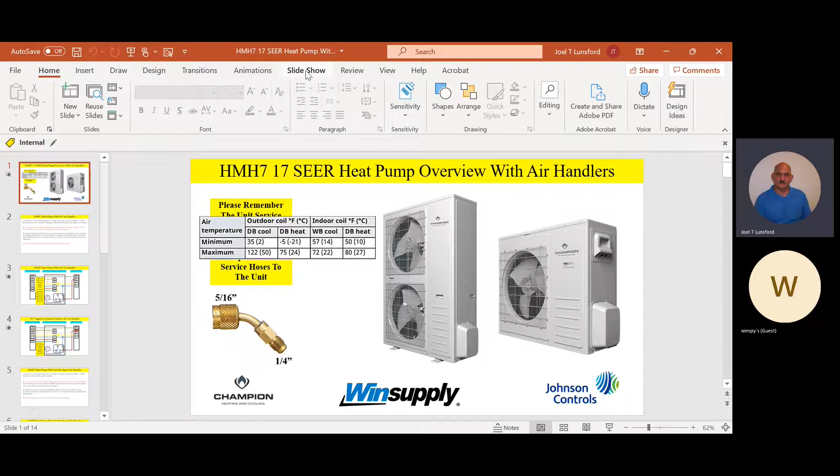And so everyone should be able to see that opening slide. There's two pictures of the outdoor product. There's a 2-fan model and a single fan model. Can everyone see that okay? Yep. Yeah, we got it.

All righty. Well, fellas, kicking off a little bit, one of the things I like to always start with our heat pump overview is the fact we've actually got two footprints, if you will. We've got a 2-fan model. That's going to be the 4 and 5 ton model. And then the single fan model will be the 2 and 3 ton model. So they come in whole tonnages, 2, 3, 4, and 5.

These units modulate on the outdoor unit from 35 to 100% capacity, even though we're going to use a conventional thermostat inside. And a conventional thermostat, what I mean by that is your favorite 24-volt thermostat. So it wires up like any other single-stage heat pump, except it actually modulates outside 35 to 100% capacity.

In addition, we get a lot of questions about the outdoor unit because it kind of looks like a mini split, with the horizontal discharge and all, but I want to stress something. It is not a mini split. Now, it shares some similar technology on the compressor in the fact that it is a modulating compressor from 35 to 100% capacity. But on the indoor coil, we use just a conventional plain Jane expansion valve. It isn't anything special. So you're going to wire it like a regular heat pump.

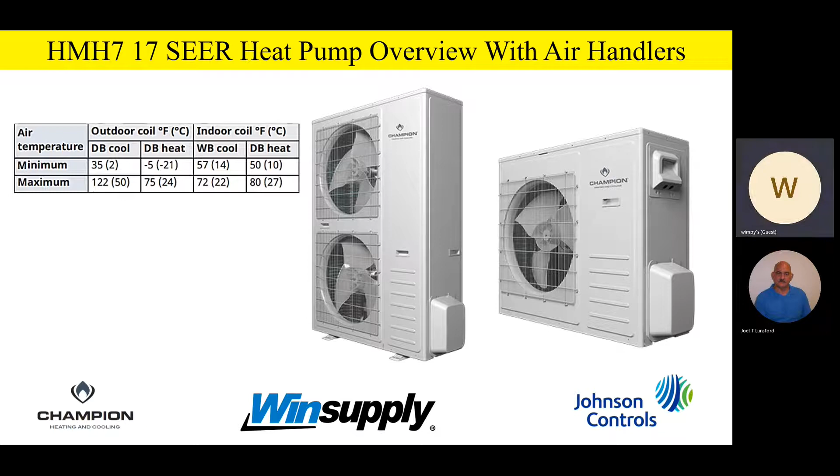Yeah, we've done a few of them so far. Okay. All right. Well, fantastic.

So fellas, at this time, we're going to jump into the low voltage wiring of this heat pump. And we're going to be focusing first thing this morning on the AE air handler, which features just a standard ECM type of motor. And then later on in the training program this morning, we'll also jump on a variable speed air handler, because I know you guys have a real heavy air handler market down there. And the variable speed air handler works very, very well with this thing as well.

So we're going to start out with the low voltage wiring with the AE air handler, and we're going to just look at a simplified block wiring diagram that I generated for this. And remember now that the AE air handler does not have any terminals on there, but they're pigtail connections, as you guys know if you've hooked some of these up. But what I've done on the PowerPoint, I've made kind of a little terminal or a little block so that you could see where it hooks up, even though I know there's pigtails on those connections.

We're also going to talk about wiring that accessory single pole double throw relay in the indoor unit and how it's going to be used for airflow reduction. So I'd mentioned earlier that this unit modulates from 35 to 100% capacity outside, but when it hits about 60 to 65% capacity, it's going to send a signal inside to a relay to reduce the airflow on the indoor coil to give you a closer match between the point of modulation or capacity outside and airflow inside.

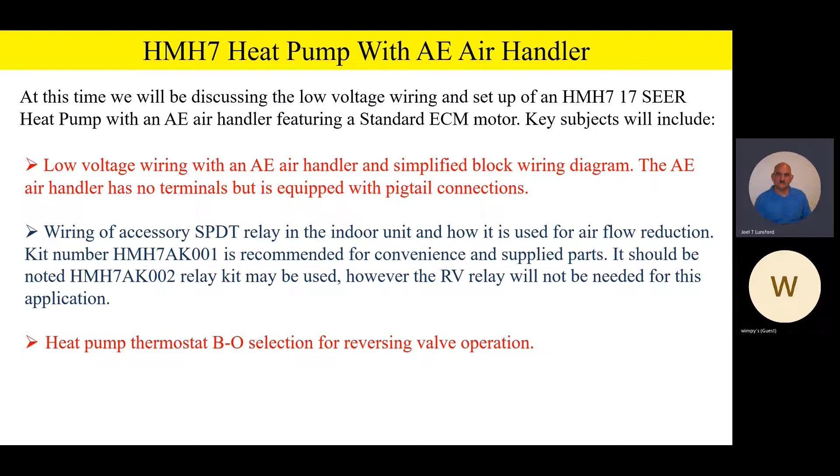So with that, let's go ahead and start looking at just a simplified block wire diagram on the AE air handler. And so we're going to literally take it wire for wire, guys, from the thermostat on the left-hand side, you can see, to the indoor unit, to the outdoor unit. And so that first wire we're going to talk about is that B terminal. The B terminal energizes the reversing valve in the heating mode of operation. And please remember, your thermostat has to have that selection for BO for heating operation on the reversing valve. And so if you've got a two-stage heat strip, we're just presuming you may have a two-stage heat strip in there.

So W2 from the thermostat will go to W2 on the air handler. That'll be your second stage auxiliary heat. And then your W1 will be from your thermostat first stage auxiliary heat to the indoor unit to the outdoor unit. Now, guys, please remember, we want to carry that on a heat pump here.

We want to carry that all the way outside, that W1, so that we can bring the heat strip on during defrost. That's what that W wire outside is for. Coming back inside to W1 is to bring the heat strip on during defrost. Then your Y terminal is going to be your compressor call.

Now you're going to note something that on some models of air handlers, if it's so equipped, you're going to see a yellow wire on the ECM motor. Now we're going to ask that you typically just remove that because we're going to be selecting some different speed selections on that ECM motor here in a little bit.

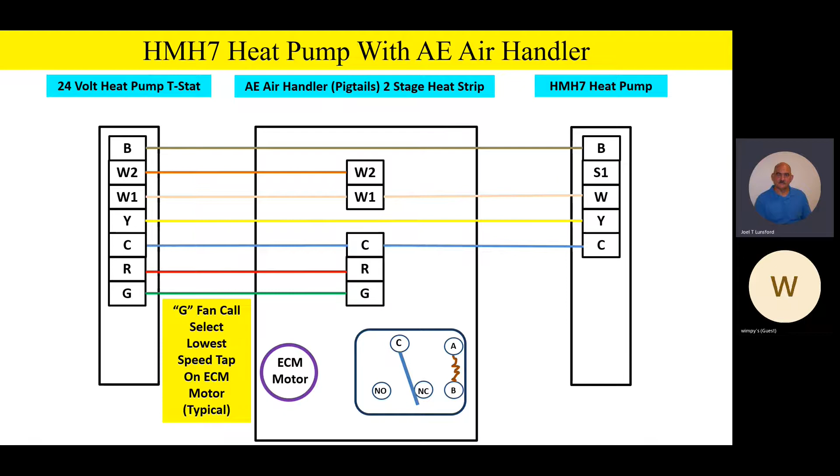So based on the type of thermostat you have, you may not want to break the red because that R terminal kind of powers the thermostat up, and some thermostats like to stay powered up for some of their functions and stuff like that. But that would work. But I would recommend the Y would probably be a little better for an overflow or like a condensate switch. Thank you. Good question. Excellent question.

All right, fellas. So as we start taking a look at some of the finer details on that relay, there's going to be a terminal outside called S1. S1 is going to be our airflow reduction signal from the outdoor unit. And we're going to take that to one side of our relay coil. It's a 24-volt signal. The other side of the relay coil is going to go to common. And that makes sense so that we complete that coil circuit to operate that relay.

So S1 will go to one side of the relay coil. The other side of the relay coil will go to common to complete that 24-volt circuit when we get that signal. Now the common terminal for the switching contacts will go up and grab that yellow wire or Y terminal going outside. So basically anytime we have a compressor call, we're going to have power to the common terminal of the switching contacts.

On the ECM motor itself, before we get into our other speed taps, our high-speed tap is typically going to go on your W. So what's going to happen is that if you get an auxiliary heat call, or if you get a defrost call outside, it's going to drive that motor to high speed for safety. Because remember, if we're bringing in heat strips, we want to make sure we have our full airflow so we don't overheat the heat strip, right?

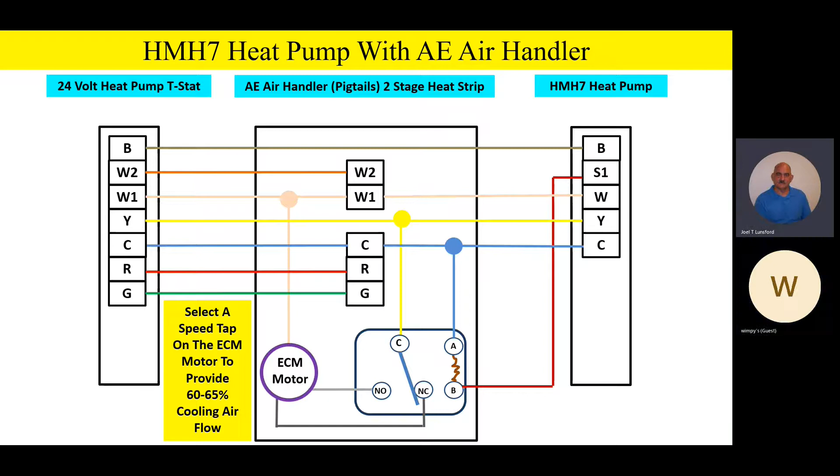All right. So as we take a look at it and we switch that relay, let me do that one more time. As we animate that and we switch that relay, what's going to happen is that S1 outside is going to be energized when we want airflow reduction. So that's the idea. The outdoor unit, when it hits about 60% capacity, is going to generate a 24-volt signal on S1. It's going to switch that relay, bang, right there, and command low airflow. So the default, when the relay is just sitting there unenergized, it's going to be 100% airflow.

But when the outdoor unit commands reduced airflow, it's going to energize the relay, switch that relay, and go to a lower speed tap to give us about 60% airflow on that reduced airflow. And so what that does is as the outdoor unit starts screwing back on capacity, when it hits that point, it says, hey, give me reduced airflow. This is going to give you better comfort. It's going to give you better humidity control and all that stuff.

So this airflow reduction circuitry is very, very simple, just a simple little relay, but it's pretty important, especially in your area where you guys can get a lot of humidity down there. So that airflow reduction is going to give you a level of comfort just unbelievable with that outdoor unit. Any questions or comments on how that's working?

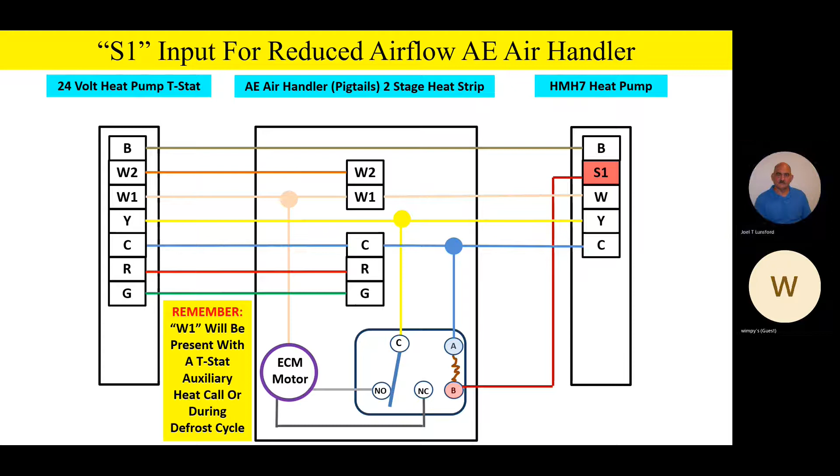Let's go ahead and talk a little bit about a variable speed air handler. I know you guys have opportunity sometimes, I'm sure, to upsell to a variable speed air handler. So let's talk about that. We're going to do the same thing. We're going to have a simplified block wiring diagram. Now, it should be noted that there are some terminals on the variable speed air handler that have nothing to do with the outdoor unit, and I just don't show them on the PowerPoint for simplicity.

You have a HUM terminal, for instance, for a humidifier output. You also have some EAC terminals for electronic air cleaner. Well, that really has nothing to do with the outdoor unit, so I don't show that on this PowerPoint. But just remember that on the variable speed air handler, you're going to have some EAC terminals, some HUM terminals, and some jumpers on the board. We're not showing that stuff right now, only to simplify the wiring diagram.

Now, it should be noted also, you're going to have the wiring accessory for that relay kit, the 002 kit, the HMH7AK002. Now, the kit comes with 2 relays on the board. That's why this kit's important, is you have to have 2 relays on the board, and they're going to be designated RV and S1. And we'll talk about those relays and what they do when we get to that point. And we're going to recommend this kit again for convenience and supplied parts.

So one more time, the question has been, hey, Joel, could I take 2 single pole double throw relays and my own biflow filter dryer and make up all my own field wiring? Well, yeah, of course you could. But hang on a second. The truth about it is, by the time you mess around with all that, you're going to more than cover the cost of just getting this little 002 kit. So the 002 kit is recommended for convenience and for supplied parts.

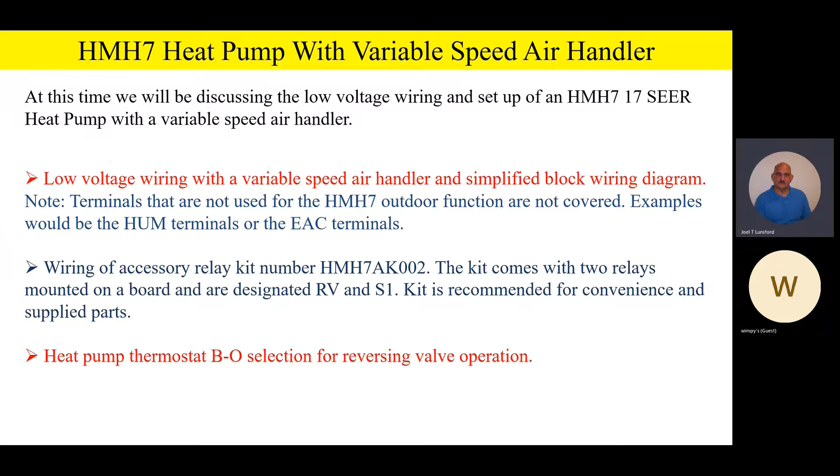In addition, fellas, please remember, on a heat pump, you're going to have a heat pump thermostat for that BO selection for reversing valve operation. As we saw in our previous slides, that BO selection is going to be necessary for the reversing valve in the heating mode of operation.

Let's go ahead and take a look at this. This is pretty straightforward. There's not a whole lot to it. We do have the 2 relays, which we'll talk about, but as far as the basic wiring, it's going to stay the same as we talked about before. B is going to energize the reversing valve in the heating mode of operation, so we have to make sure and have a thermostat with the BO selection, as we mentioned. W2 is second stage auxiliary heat, just like we had before.

It's pretty straightforward. W1 is first stage auxiliary heat that's going to go straight outside to the outdoor unit, just like before. It'll bring that on during defrost as well as auxiliary heat call. And then Y is going to go outside as our compressor call, just like before. You guys are recognizing this block diagram because it's essentially the same as we had before. It's just we're dealing with a variable speed air handler and a couple different little designations on the terminals. C is 24 volt common, just like we had before.

R is 24 volt hot. That's not going to go outside. And G is our 24 volt fan call. And again, we're going to recommend that when you set your airflow setting up, the board itself has some jumpers. When you set that up, and you set up your airflow for the tonnage of the outdoor unit, again 400 CFM per ton, when you get a G call, that'll actually be a reduced airflow automatically on the board.

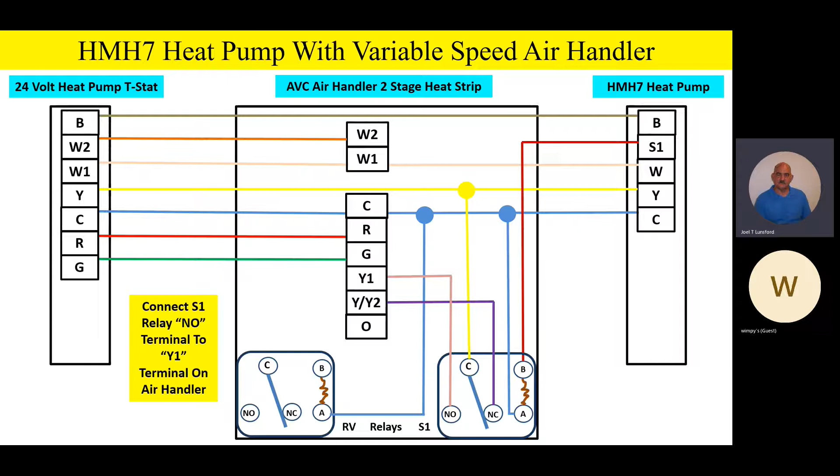Now on the variable speed control board, once you set up your airflow setting on your cool and adjust jumpers to your 400 CFM per ton, you got a 3-ton unit outside and you set it up for 1200 CFM, when the board sees a Y1 call, it's going to automatically reduce that airflow to 65%.

Let me say that one more time. Once you set your airflow up with your cool and adjust jumper on the airflow settings, and you set it up for, say, a 3-ton unit, 1200 CFM, when the board sees a Y1 call, it automatically drives that fan to 65% airflow. So you don't have to select a speed tap. The board automatically is going to drive that variable speed motor to 65% airflow when it sees a Y1 call. Any questions or comments on that so far?

No, I think everybody's good. Yep, I think we're with you.

Okay, good. Excellent. On the RV relay, we're going to take the other side of the relay coil, and we're going to go up and tie into that B terminal going outside for the heating mode of operation. Because that RV relay is going to sit there and energize from the Y signal anytime. So we're going to take 24 volts from the Y signal and go down and hit the common terminal on the RV relay. And then the normally closed contact on the RV relay goes up and hits the O terminal.

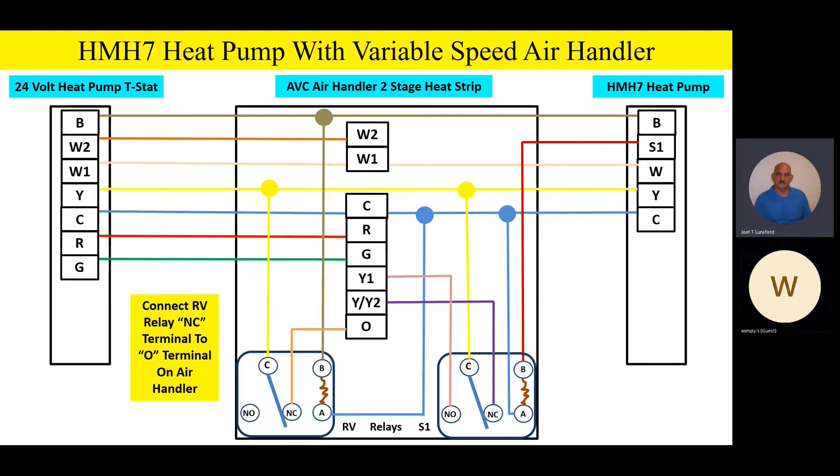All right. So as we take a look at this, let's go ahead and do the airflow reduction first. So let me back up and do that animation one more time. Watch the animation on the screen. When we energize S1, we're going to reduce our airflow in the cooling mode, just like we did before. We're going to be commanding Y1 in this example. And so we're now at 65% airflow, Y1, from the S1 output from the outdoor unit on that S1 relay.

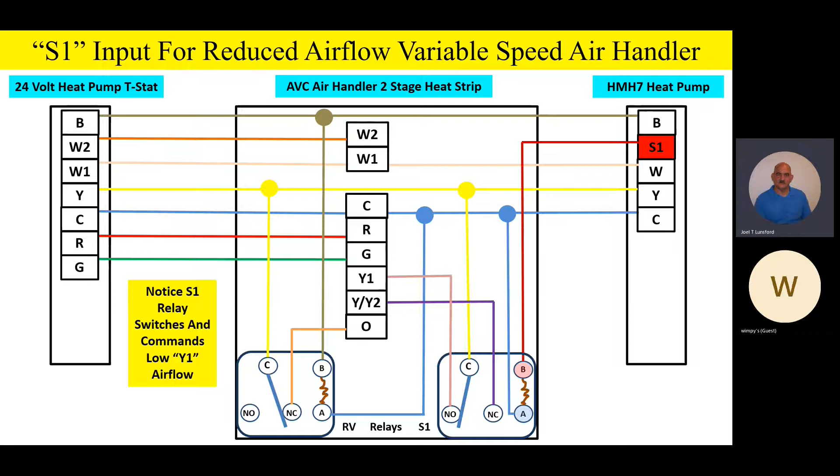When we go into the heating mode of operation, let me back up one more time. When we energize the B terminal for heating mode, bang, we're going to energize the relay, the RV relay, and we're going to break the O terminal, thus telling the indoor variable speed air handler, hey, we're in the heating mode of operation.

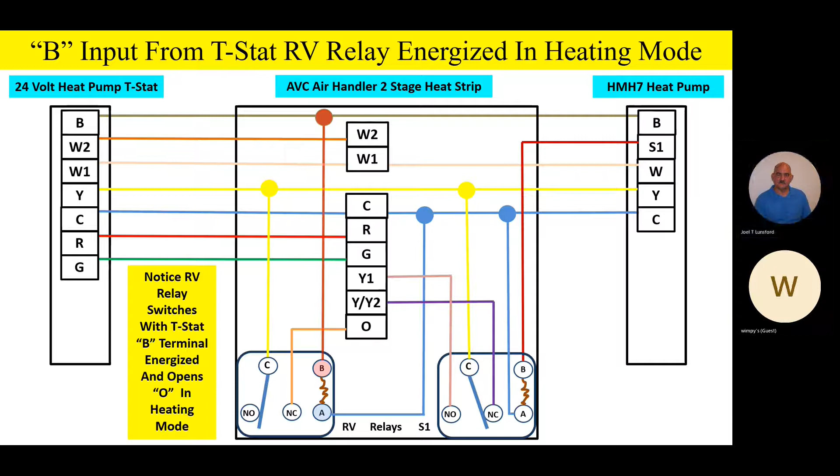So when we break that O terminal, it knows we're in the heating mode of operation, and that's the only reason that RV relay is necessary, is to handle that O signal in the heating and the cooling mode of operation. Any questions or comments on any of that stuff before we jump into a couple other little things? No, I think we're on board. Everybody good? All right.

Let's talk a little bit about some cooling only application. I know you cats get some of that down where you are, and so we're going to go ahead and cover that as well. We're going to kind of breeze through this a little bit only because we've already talked about the low voltage wiring. The big thing about cooling only application, you're going to notice we don't have a B terminal going outside. We're just not going to use the reversing valve outside.

Now, please write this down. There's a couple things I want everybody to really wrap their noodle around. So if you're going to use this in a cooling only application, you still want to use a bi-flow filter dryer. And the reason is because one of the normal functions of this heat pump is it will go into the heating mode literally just for 10 or 15 seconds sometimes to exercise the reversing valve,

just to keep it moving, right? And so that exercise routine, even though there's no signal for B terminals, there's nothing saying, hey, we want to go into the heating mode. We've had some field reports that the unit will go through an exercise routine. It'll go into the heating mode, and it might do it for 10 seconds and then go right back into the normal mode, cooling mode.

But it's important that we have a bi-flow filter dryer on there, because if it goes through that exercise routine, we don't want to have a liquid circuit restriction, and we don't want to have a problem because we don't have a bi-flow filter dryer on the liquid line, right? The other thing is make sure that when you hook these up in a straight cooling application, that you still use a coil on the indoor unit.

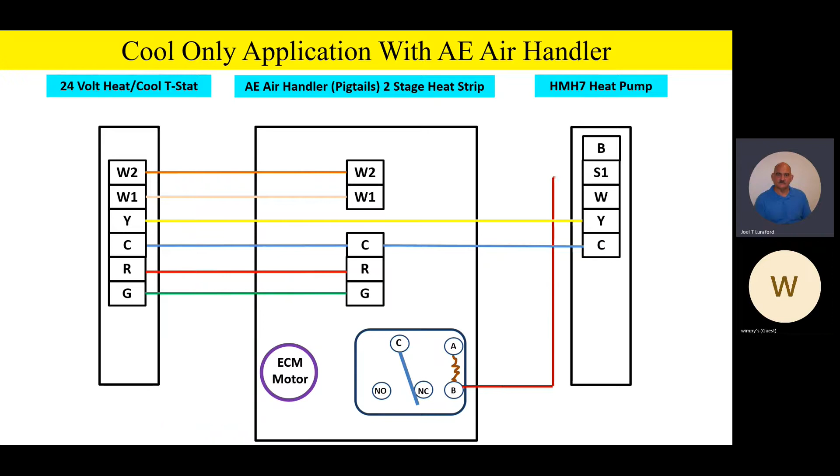Y terminal will still go outside just like before. C terminal will go outside just like before. And so there's our two wires outside, for common and yellow wire going outside. R terminal goes to the indoor unit only. G terminal goes to the indoor unit only. Now, when you hook up your relay and all that, you're still going to do the same thing as you did before. One side of the relay is going to go to S1. The other side of the relay coil is going to go to common.

And so you're going to notice on straight cool application, you're only going to have 3 wires outside. Yellow, common, and S1 for your airflow reduction on your relay. And just like we had before, your common terminal on the relay for the switching contacts will go to yellow, just like before, to Y terminal. Just like we had before, your high-speed tap is going to be on your ECM motor for your auxiliary heat, which you'd expect when you bring those heat strips on.

Your normally closed contact is going to be 100% airflow on the relay. Your normally open contact is going to be 60 to 65%, just like you had before. So it's going to be exactly like you had before on the AE air handler. The only difference is you're not taking B terminal outside, you're not taking the W terminal outside, but you're still using a biflow filter dryer, and you're still going to be using an indoor coil that's heat pump compatible. So if you do have a straight cool application with only 3 wires outside, this would be the way to do it.

Any questions or comments on that before we look at a variable speed situation with straight cool, and then we'll talk a little bit about some airflow considerations as we wrap up the training this morning. What if you only have 2 wires outside? Okay, I get that question quite a bit. So if I only had 2 wires outside, I would not have that airflow reduction capacity, would I? And so the unit would sit here and modulate back, but you'd still have 100% airflow.

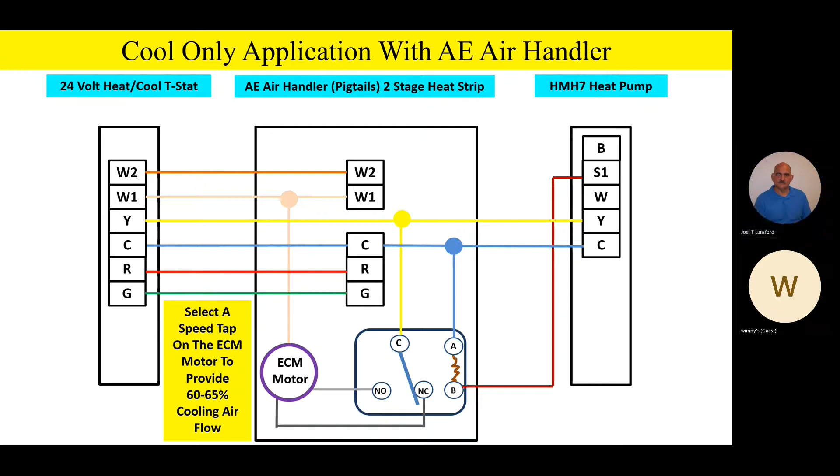Because remember, that O terminal has some advanced functions, but if you go down on that jumper that says AC and HP, be sure and select the AC on the variable speed air handler, to tell that board to ignore that O terminal. And that's what that does. So when you put that jumper on AC, it tells it's on a straight AC unit outside, and to ignore that O terminal. So be sure and do that. Then if you do that, it's going to be pretty straightforward, just like you had before.

W1 and W2 will be your heat strips. Y is going to go outside. 24 volt common all the way through. This looks real familiar to you. R is your 24 volt hot that does not go outside. G is your fan call, just like before. And then now, if it's straight cool application, fellas, you don't need that RV relay, do you? You don't need that second relay because you're not dealing with any of the O terminal circuitry. So now it's just going to be just a regular

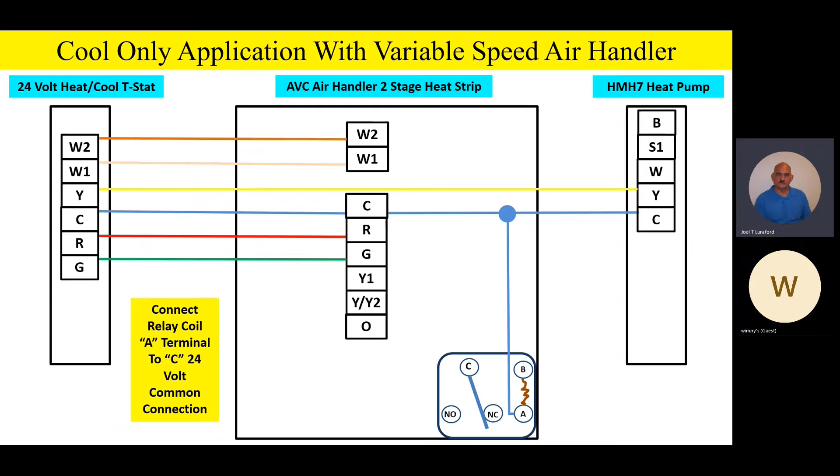single relay inside. One side of the relay coil will go to common. The other side will go to S1. 24 volt common on Y terminal will go to your common terminal on your switching contacts. Normally closed will go to Y2, and Y1 will be normally open contact on the relay. So on a cool only application, you only need the one relay. So let me say that one more time. In a cool only application, you only need the one relay on a variable speed product because we're not dealing with the O terminal.

And of course, if you have existing ductwork, we're going to talk. Are there any questions or comments on the block wiring diagrams before we talk a little bit about some airflow considerations as we kind of wrap up the training this morning? No. Everybody good? Wait. So when it's doing this, whether heat pump or cool, Y1 gives it 65%. Is that right? That is correct.

Good. So excellent question. On a variable speed air handler, Y1 is going to be 65% airflow automatically, because wherever you have your cool and adjust jumper and whatever airflow you have set up on your cooling airflow, when it sees a Y1 signal on a variable speed air handler, the board's just going to automatically drive the fan to 65% airflow of whatever you have your airflow settings set up. Good question. That is correct.

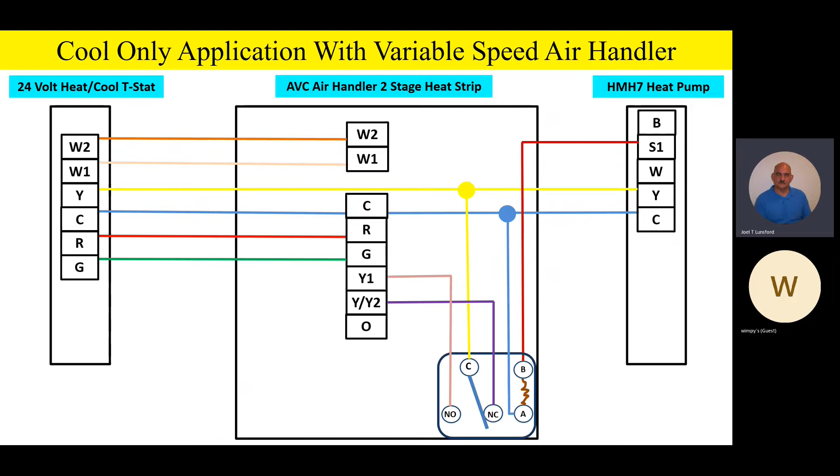takes me into the next little thing, some airflow considerations. Let me go ahead and pop that little screen and let's talk a little bit about that. Because remember, on every install, you want to make sure you've got your proper airflow, because it is a modulating system. Airflow is going to be real critical, because if it's looking at suction line temperature and outdoor air temperature and all those things, what's going to happen, fellas, is if we have lousy ductwork or lousy airflow, the evaporator is going to get cold, and the outdoor unit's going to perceive that as a reduction in capacity.

So we want to make sure our ductwork is in good shape and we've got proper airflow, because if I start icing up that evaporator, for instance, let's say I've got a really dirty air filter, or let's say undersized ductwork or whatever, and I start icing that coil up inside, the outdoor unit's going to say, oh, gee whiz, it's just a reduction in capacity. So I'm going to start screwing my capacity back. And so it really ties into what your good questions are about modulation and capacity and stuff like that.

Well, part of that capacity reduction technology is looking at suction line temperature, and therefore suction line pressure, and therefore evaporator pressure, and therefore if the evaporator's iced up, suction pressure goes down, suction line temperature goes down, we start icing the coil. You cats get the idea. And so the outdoor unit would perceive that as a normal, oh gee whiz, I'm reducing capacity because my indoor coil's getting cold. You see what I'm driving at?

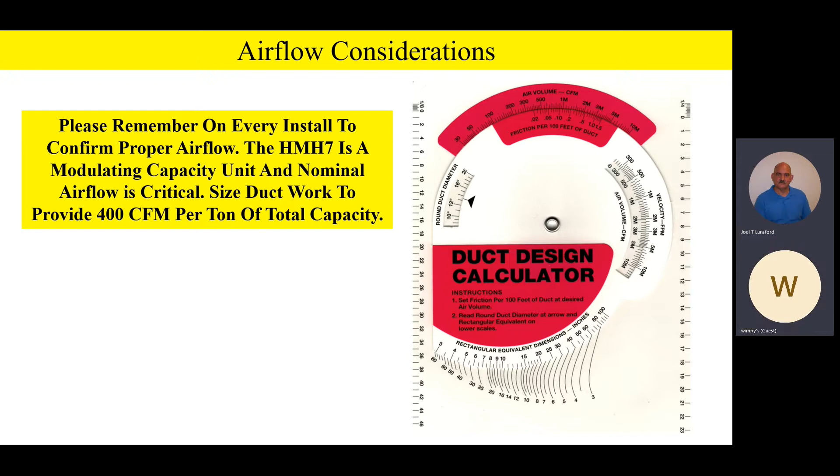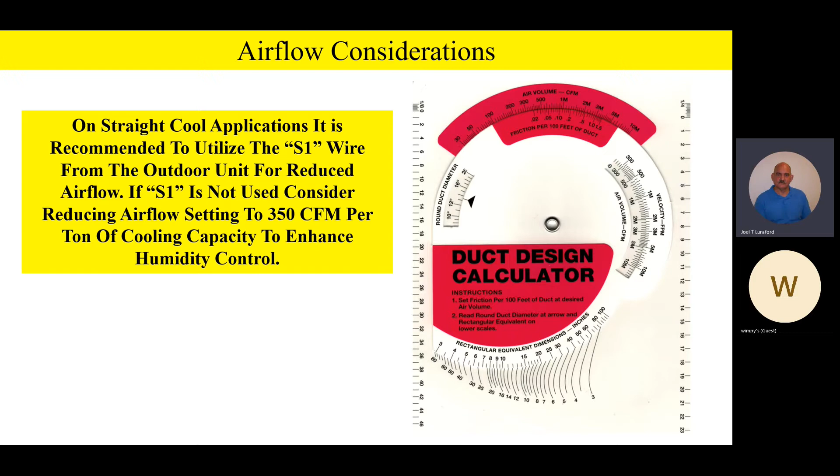Well, fantastic, fellas. The other thing I'd like everyone to remember on straight cool applications, it's recommended to utilize that S1 wire, again, from the outdoor unit for reduced airflow. And if S1 is not used, please consider reducing that airflow to about 350, like we said those guys in Texas were doing, to help enhance that humidity control.

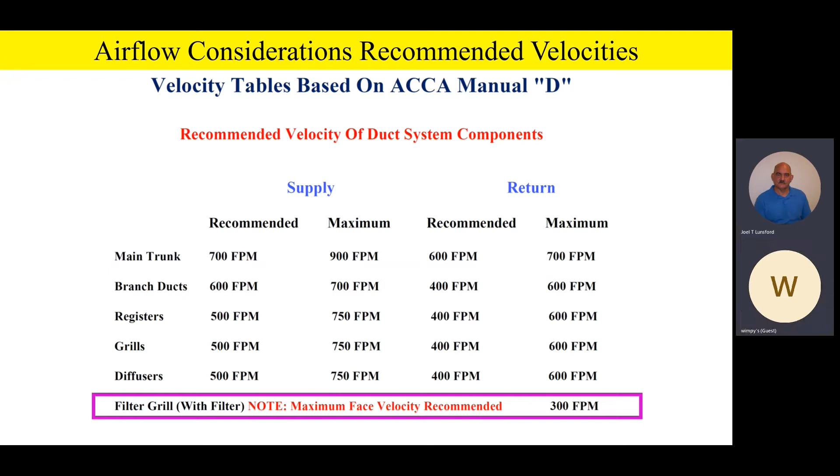And finally, as a final note, please remember that if you've got a return grill with a filter in it, Manual D recommends we do not exceed 300 feet a minute velocity across that filter. So just keep those things in mind when you're setting up your airflow, because it's going to be really, really important on a modulating system that we have that proper airflow. Because if we don't, it's going to perceive that as a capacity reduction, like we talked about.

So you may have answered that first. When the dehumidistat feature, if we wanted to use that, no matter what the dehumidistat would be set to, it would take Y1 from 100% to 82%? Is that what you said? Yes, I like that. Good question.

So on their variable speed air handler, if you have the dehumidification function enabled with the purple wire like we talked about, whatever airflow that board is driving normally, if that humidistat is open electrically on a dehum function, it will reduce that point of airflow. Let's say we're at 1,000 CFM on a 2.5 ton unit, or 800 CFM on a 2-ton unit, driving along at 100% airflow, and all of a sudden that humidistat opens electrically, it'll take that down to 82% of 800. So about 650 CFM, something like that.

What if it was on the 65% airflow? Would it take that down as well? Ooh, I love that. Good question. And the answer is absolutely. If you're on a Y1 call, 65% airflow, and you happen to open that humidistat, it'll then become 82% of that 65% airflow. So regardless of what the airflow is in the cooling mode, if that dehum switch opens electrically on a rise of humidity, it's going to drive that airflow to 82% of wherever it happens to be, Y1 or Y2.